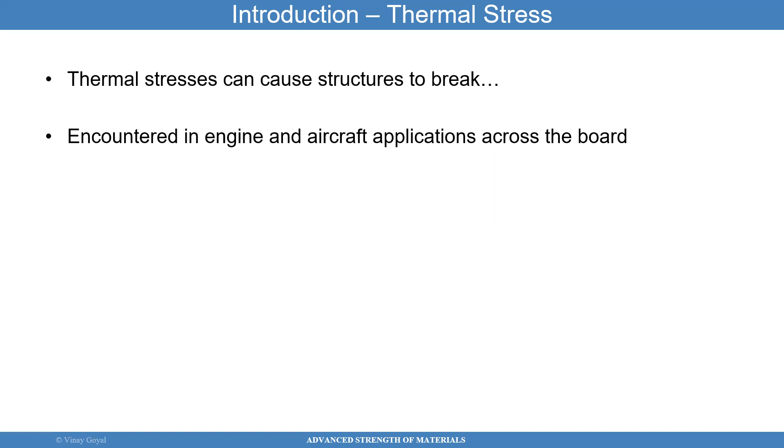So thermal stresses can cause structures to break. I gave you two examples, just practical examples for you to consider.

So even if there's no stress in the structure, and I apply a thermal loading to a structure, it's going to expand or contract. Alpha here is called the coefficient of thermal expansion, and the coefficient of thermal expansion can be measured in a lab environment. There are multiple tests that can be done to measure that particular property.

I won't particularly cover it today, but there is a test, the E831 ASTM standard, which is able to measure the rate at which the material expands as a function of temperature.

For some materials, alpha will also depend on temperature. So the coefficient of thermal expansion for a lot of the applications you'll be working on could be constant across a range of temperature, but let me emphasize, there are materials where the coefficient of thermal expansion can also depend on temperature.

If you recall, strain is a measure of relative deflection. So if I have no stress in the system, but I had a delta T and a strain shows up, that strain is showing up because of the delta T, the temperature you're introducing into the system, times the coefficient of thermal expansion gives you the strain.

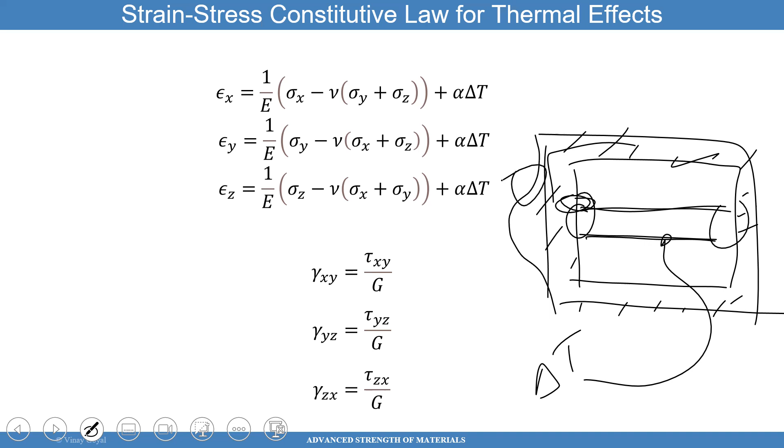Agree? If that bar is pushing out, don't you think you're going to get a lot of shear there? Potentially. But when I'm showing these equations, I'm talking about a material that's unrestrained in free air — just freestanding — and I applied a delta T load. That's what will happen. But it doesn't mean it won't produce a shear strain when it's embedded in something else. Does that make sense to you?

Okay, great — and then I do have another question. That's an excellent question, absolutely. In orthotropic materials like composites, you do have a difference in the coefficient of thermal expansion in each of the 3 directions. I have a whole series on YouTube that teaches composite materials where I cover how to deal with the coefficient of thermal expansion in that case. But for this particular lecture, I feel the right thing to do is stick to isotropic materials, and later on you can take a composites course that covers those more complicated problems.

Great, and so I can invert these relationships to get the stress-strain relationship.

I think we have a problem. This equation here — don't memorize it, but put some effort to understand how it was derived, because I actually derived these equations using just logic. They don't require some mathematical derivation, just experiments. I did some virtual experiments in class on how these coefficients can be derived.

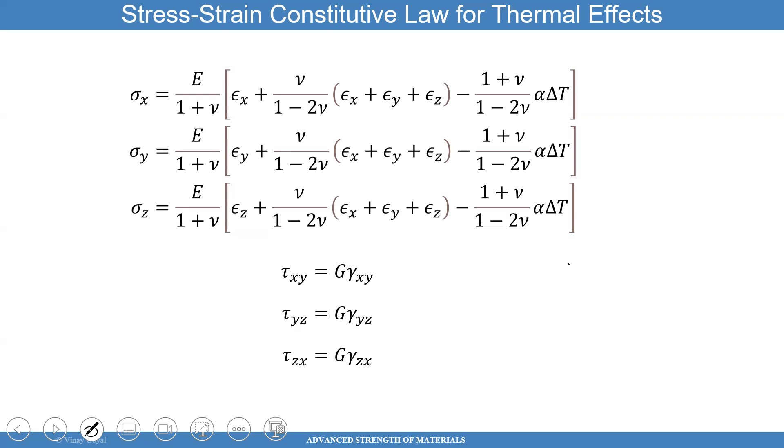I want to specialize this problem to 3D, because in 3D we can probably solve a lot of different kinds of problems fairly easily. In fact, we can do one quickly so you can see what it'll feel like. Say I have this rectangle here - this is the X, this is the Y, and this is the Z.

I have that chunk of metal that I'm trying to figure out what's going on. You can use this fairly quickly to solve any problem. So if I know this boundary is fixed, the epsilon x, say the x direction is fixed, and I apply a heat here, delta T.

Let's look at what we do know. We know the modulus, so let me circle everything that I know. I know the modulus, the Poisson ratio, the delta T, and alpha. In reality, I know all this stuff. The only thing I don't know, according to this problem statement, is epsilon xx, epsilon yy, and epsilon zz.

If you notice, because I'm fixing this on this end and this end here, I'm fixing that bar. For this particular problem, you can quickly see that epsilon xx should be 0. Let me erase this to make it more clear. This right here.

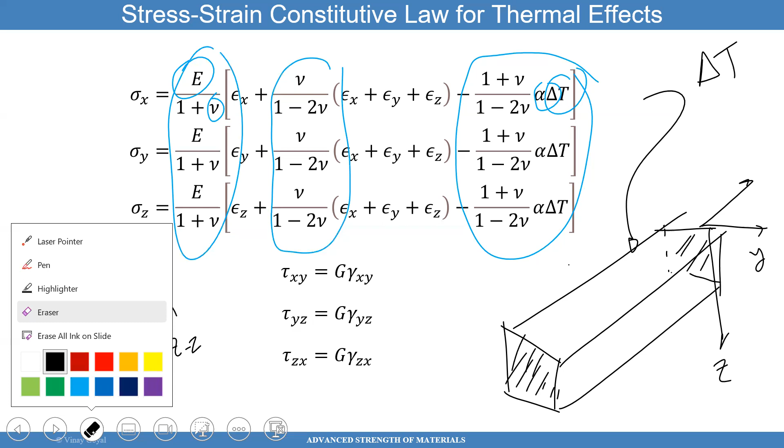I did order a pen, so it should arrive soon. And that way we can use a pen to explain this.

This is 0, right? We also have that on this boundary, the boundary surrounding this material, I'm not applying any stress - is that correct? I'm not applying any stress, so you can set that equal to 0. There's no stresses on this one at that boundary.

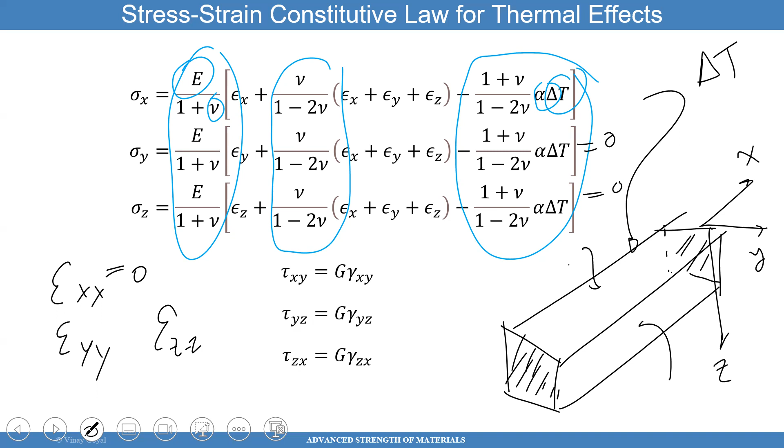Then you can use these equations to solve for the unknowns fairly quickly, for the strains, for the stresses, and all that. So 3D is fairly easy to visualize, but why don't we apply this to problems that we can actually get a solution for fairly quickly, for interesting problems, right?

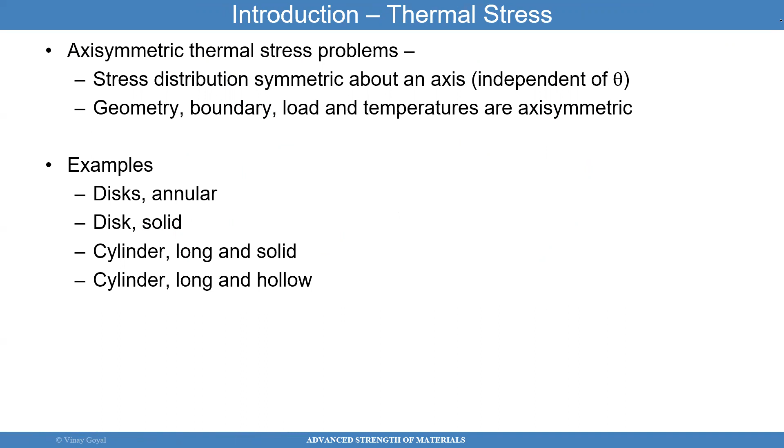So first, I'm going to cover disks - solid, annular - and then I'll move to a cylinder that's fairly long, solid, and then hollow again. So that's today's lecture. I'll apply the thermal stress concepts to that problem.

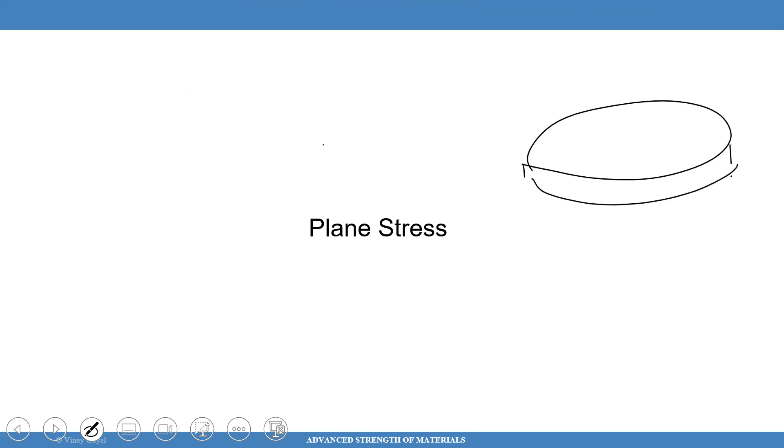Let's start with plane stress. A plane stress problem is one where the body of material is fairly thin, where through-thickness stresses cannot develop very much. To remind you what that is, say I have this disk, and this is the z direction. If this thickness h is relatively small, then sigma zz, sigma xz, and sigma yz will be approximately equal to 0.

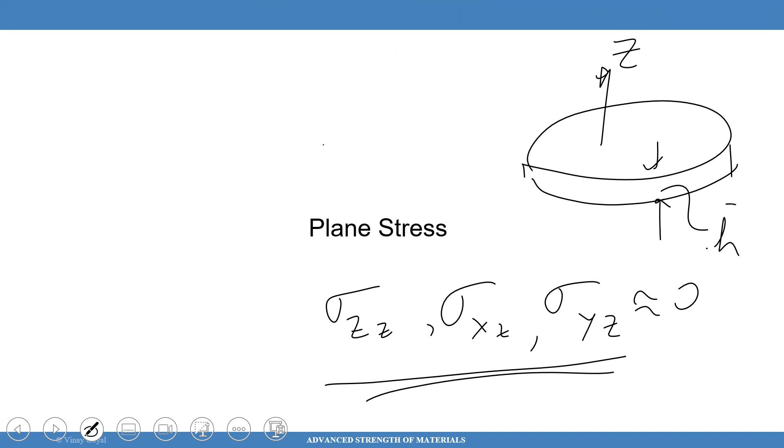Okay, so that's what plane stress means. You have a fairly thin subject of material where you don't have the ability of these stresses to develop into high values through the thickness because it's so thin anyway. So that's what's going on there with that particular thing.

Now let's revise everything now that I'm converting this to a plane stress problem. I'm going to drop the z term, and you can see here I did that because the cylinder in polar coordinates has r, theta, and z as the coordinates. If you recall, what you really have for the coordinate system is radius, theta, and z.

But I'm assuming that anything with z is 0 because we're assuming plane stress. As a consequence, I have simplified the strain-stress relationships by setting sigma zz to 0. And so now everything simplifies to what you see here.

Now here I put T, but delta T to me makes more sense. Every book does it differently - some books just put T, some other books put delta T. I think delta T makes more sense because if you're manufacturing something at room temperature, that's your reference temperature, and that's the unstrained state. So you need some reference to figure out what the strain is - it's a relative measurement.

So you need to understand, basically what I'm saying is delta T equals T, the final temperature, minus the initial temperature. And the strain is 0 at a temperature of T-naught. So it starts at a particular undeformed state, some set of coordinates of that system. But when you heat it up, it changes in shape or size. That's why I prefer using delta T rather than T. A lot of books use T, but I prefer the delta T approach. I just want to explain that to you.

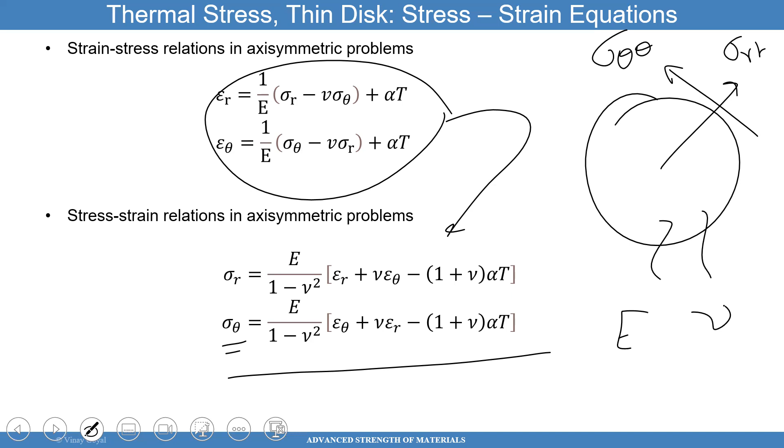We can now recur back to the equilibrium equations. This is the equilibrium equations, which we learned already from the previous lecture. I keep using the same formulas. If we assume axisymmetry, where we don't have any dependence on theta, then the tangential deflection V is 0. So there's no deflection tangentially, all the deflections are radial, and there are no dependencies on theta, so any derivatives with respect to theta are 0.

So therefore you get these strain deflection relationships. And what I can do now is plug these relationships into the stress strain relationships. I know the strains, so I can make the stresses a function of deflections, in the bottom equation there.

When I plug this into the constitutive law, what I get is, and then I plug this into the equilibrium equations. So that's step number 1: plug in the strains into the constitutive law, then plug those into the equilibrium equations as the next step. Let me clarify that.

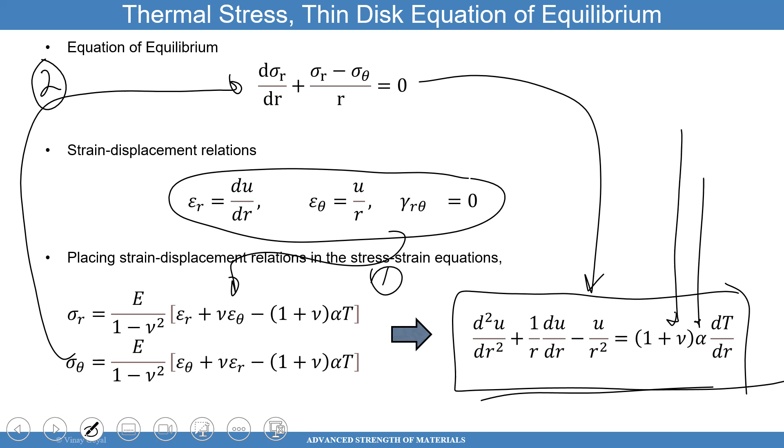So I plug the strains into the stress-strain relationships, and then plug the stresses into the equilibrium equations, and those turn into this differential equation, where the only unknown is deflection. I know alpha, I know the Poisson ratio, and the term on the right turns out to be the derivative of temperature with respect to radius, meaning the temperature can vary with the radius. What I can do now is simply solve this differential equation by integrating it.

So I did a little math trick, I did not invent this. You can take this equation here and write it a little differently. It turns out that this right here is the same thing as this right here. It doesn't look like it, but it is. This right here is the same thing as that. It's a little trick, I invite you to try it at home. I'm not going to do it here, but if you did it, I think you'd get the same thing as I have above.

So it's a little math trick, but it's very nice because now I can integrate this equation very easily. Integrate it once, and you can see here I integrated it. Then if you integrate it again, you get the deflection as a function of two constants, C1 and C2, integrating from A to R. Obviously you have to have somewhere to start, the limits of integration. Any questions so far on this particular point?

Let me remind you, the question was, what is U? I want to make sure that's clear. U is, let me draw it again to make sure we're all on the same page here. U is this deflection here, while this is V. And we're saying that V is 0, but U can be found, that's what I'm looking for. There's another question on here: why do I get a differential equation?

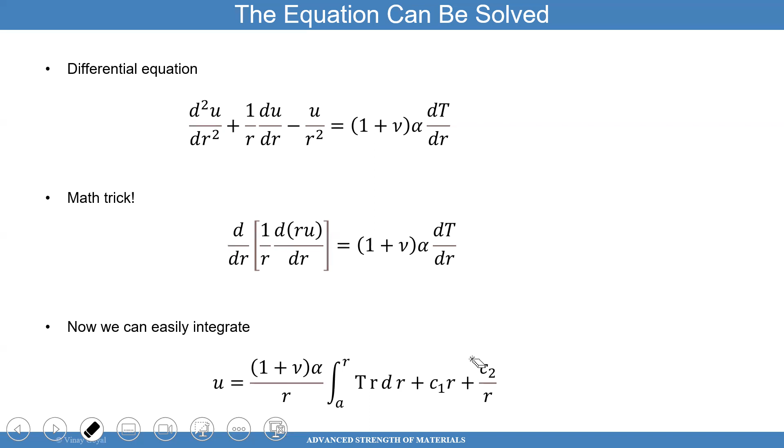How do I find constants in a differential equation? Boundary conditions. I need to study the boundary condition of the problem. For the general case, once you find the deflections, the radial deflection can be plugged into the strain deflection relationship, and once you know the strains, you can get the stresses.

And the stresses will look like this. It looks a little messy, but that's what you get. Once I know the solution for the differential equation, I can plug the radial deflection into the strain deflection relationship. Those equations, now in terms of deflection, can be plugged back into the constitutive law to get stress as a function of temperature, as you see in this equation.

So by solving for the deflection, I'm able to find the stresses as well. In other words, anytime you know the deflection, you know the strain, and if you know the strain, you know the stresses. How is that? Because if I know deflections, I know the strains through the strain deflection relationships, and then I know stresses from the stress strain relationship. That's how things are linked.

So we've done that, but now how do I find C1 and C2? I want to be able to use the boundary conditions. I'll pause here for a second in case there are any thoughts, pointers, or questions you have.

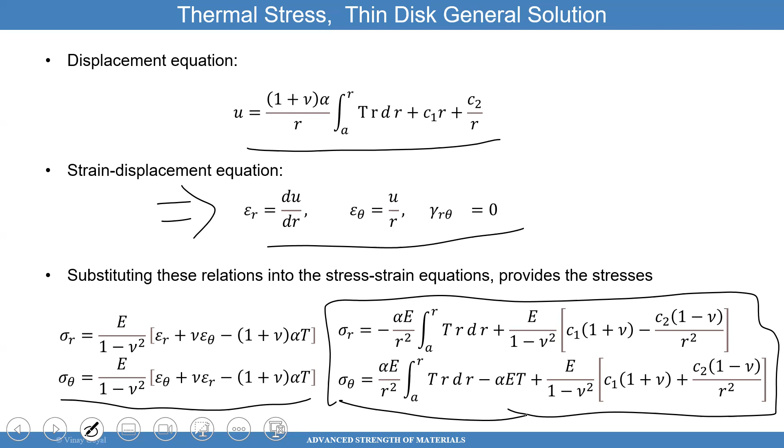If you don't have that, I'll move on to the next slide where I repeat it. I repeated this equation on the next slide because I know you're taking notes, so no worries.

I'm going to study an annular disk subjected to a thermal delta T, a temperature change. An annular disk is going to have these boundary conditions: the radial stress at R equals A, which is right here. I'm talking about this right here. Let me see if I can get the laser pointer to work. Right there, R equals A, and R equals B is over here.

At R equals A, the radial stress is 0 because it's a free surface and the radial component of stress is pointed radially, that's why that stress is 0. Outside of this body of material, you can see it's also a radial stress of 0, because there's no load acting to compress this. So the boundary conditions are this for the problem.

I'm ready now. All I have to do is notice that for this equation here, then one here at the top, sigma RR, I can impose these two boundary conditions, which gives me two equations with two unknowns for which I can solve for C1 and C2. I didn't do the derivation here because it's something you can do at home, but you get C1 and C2 fairly easily.

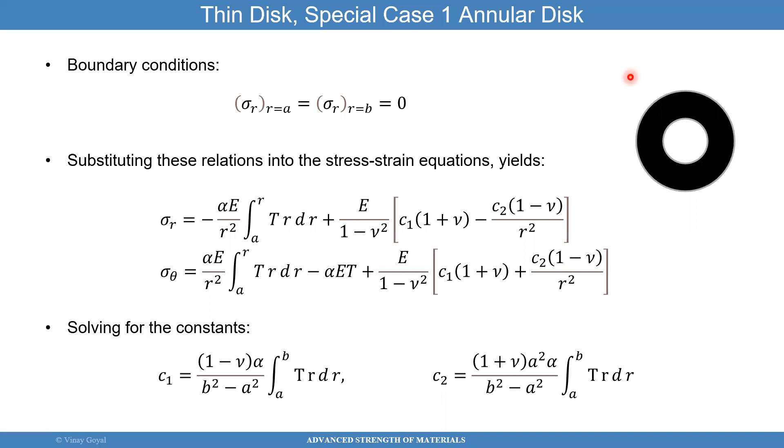All right, let's do that. Let's look at the solid disk. The solid disk is an interesting problem because I'm going to use the same equations. There's no reason why I cannot use the same equations, right? The difference is the boundary conditions. Will you agree that the difference between this solid disk and the hollow disk is the boundary condition? The equations are the same, but the boundary conditions are different.

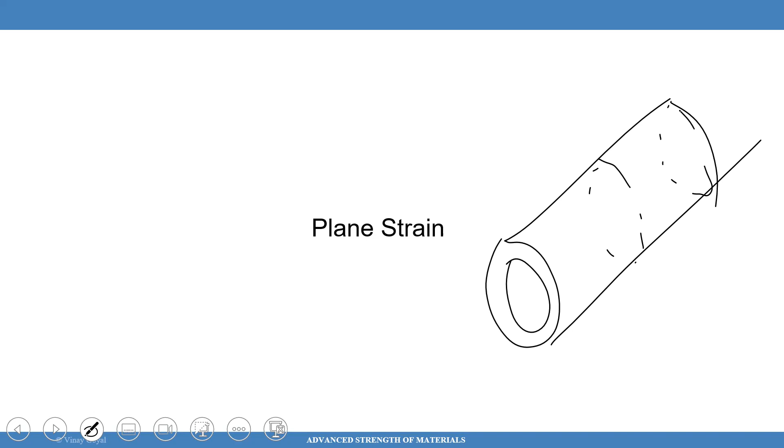Okay, so we're going to move on next to plane strain. So again, I'll cover thermoelasticity. This part B of the lecture today, I'll be covering how to apply it to a plane strain problem. What was really plane strain? Plane strain was a situation where you have a very long tube, and I'm able to say that every cross section is very likely to behave like the next cross section. If you can do that, you're able to simplify the problem further. So we're going to study that plane strain.

Let me remind you what the strain stress relationships look like. But before we tackle this problem, let's consider a long cylinder that is constrained on both ends, fully constrained on both ends. If the cylinder is constrained on both ends, doesn't that mean that epsilon ZZ is 0? Let me draw a picture of what I mean. I have this long cylinder, Z goes this way, X goes this way, and Y goes that way. What I'm saying is I'm going to fix it right here, and I'm going to fix it right here as well. Do you agree that if I'm keeping those ends fixed, there's no relative deflection of this surface to that surface? You agree? Doesn't that mean that in this direction, the strain should be 0? Because I'm keeping it fixed. Yeah.

So that means I can use the same constitutive laws I had before, but I'm going to plug in the fact that epsilon zz is 0. I can impose that condition. And if I impose epsilon zz equal to 0 in this condition, it turns out I can solve for the stress in that direction. You see that? I can solve it. If I solve for stress in that direction, I get nu times sigma r plus sigma theta, minus alpha times E times T. That's the stress along the cylinder, right? Any questions on that? Yes.

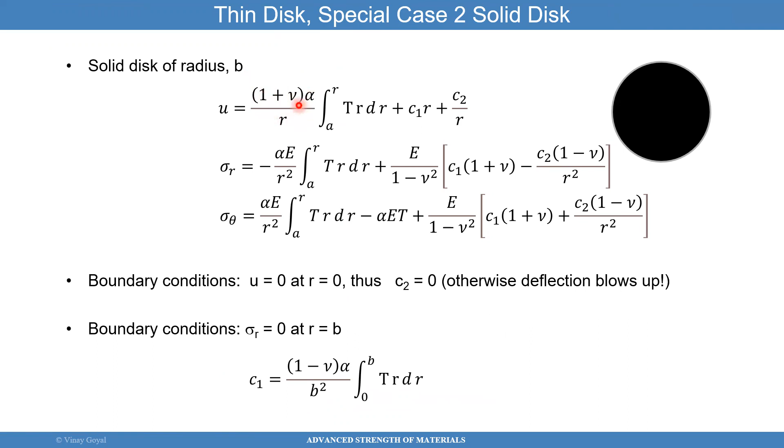This equation is different from the one we got for the plane stress situation. It looks very similar, but it's not the same, and I can compare them for you here. You can see this is 1 plus nu alpha divided by r for the plane stress situation, where the radial deflection is 1 plus nu alpha divided by r, but this one here is 1 plus nu alpha divided by 1 minus nu times r. So a little bit different there, the Poisson effect comes into play. It makes total sense to me.

So now that I know the deflection, step back. If I know the deflection, I know the strains in terms of the constants. If I know the strains, I can plug it in here and solve for stresses, which I didn't give you here, but you can solve for stresses. And when you solve for stresses, one of the stresses you get is radial stress. When you solve for radial stress.

Once I find sigma r, I'm ready because I can find sigma theta from this very equation here, the equilibrium equation. I know sigma r, plug it in here, solve for sigma theta. That's how you find sigma theta. I won't even go into the details on how to find that because that's a plug and play.

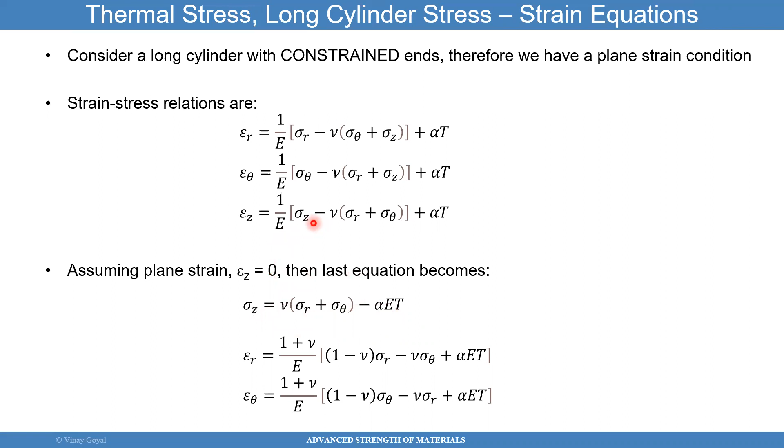Sigma z, I already gave you the formula for sigma z. It was over here in the back. Sigma z is that. I found sigma z by solving for epsilon z equals 0 from this equation. That's how I found sigma z. So just plug it in there, and when I do, I get this equation here for sigma z.

We'll just keep moving here then. No questions on that. Awesome.

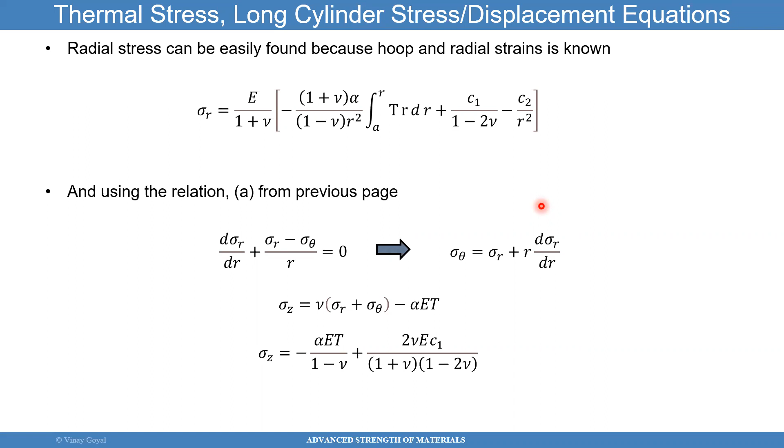Let's look at the problem of a solid cylinder with a fixed end. Let's apply the boundary conditions now, I haven't done that yet. So the boundary conditions for a solid cylinder: u equals 0 at r equals 0, because at the center of the solid disk or solid cylinder, the center cannot be moving around. So therefore, it's the same situation where C2 goes away.

It's the same situation also for the solid cylinder that sigma r is 0 at the outer boundary. So I plug in what r is, which is b at that boundary if the outer radius is b. And when you do that, you're able to find C1.

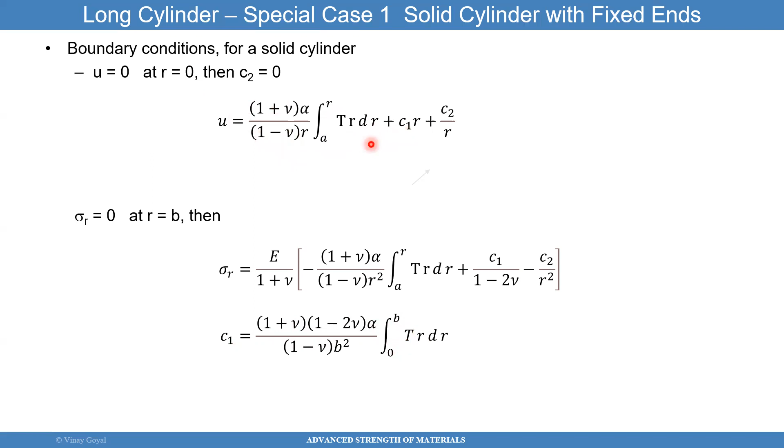So once you find deflection, because you have the deflection in terms of C1, you can see here at the bottom I found C1. Once I know C1, I know everything because I know the deflection in terms of C1. Once I know deflections, I know strains. Once I know strains, I know stresses. So they're all connected. Once you know one thing, you know everything else through this relationship you see here.

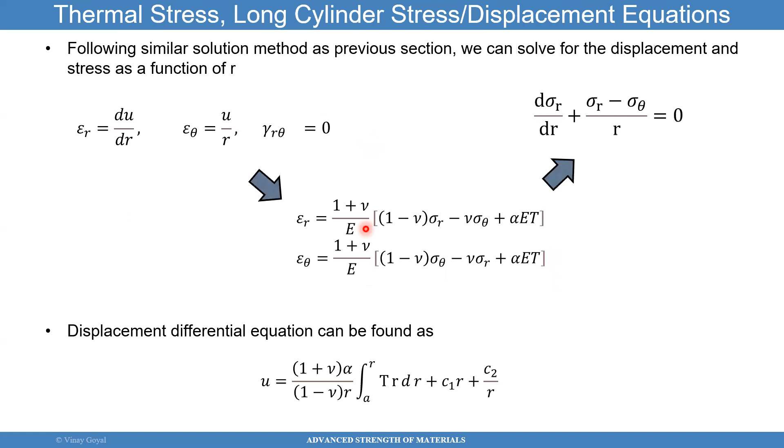Very cool, I think it's a very straightforward problem. You can see that everything turns out very nice. For example, if it's a solid material that's a cylinder, at r equals b, you can see that this term goes away. It makes sense because sigma r should be 0 at the boundary. So that makes total sense.

We can try other things like plotting the temperature. What is the temperature, say what is the stress in the center. We can probably solve for that too. You can do every combination you want, and see what will happen, just out of curiosity.

Okay, so that's what we get. Any questions?

Do you agree that if you're studying a heat conduction problem where you apply temperature, say to an iPhone, so it's getting hot where you're putting the charger, do you agree that temperature could vary across? So it's possible that I can give you a temperature distribution that's not constant. So delta T, I can tell you, hey in the exam that'll be problem number 4, that the delta T I'm applying can vary across the bar. Tell me what the stresses are. This should be able to account for that, right? Because then I can give you the temperature distribution as a function of radius, and you should be able to plug that in to solve for what the stress is.

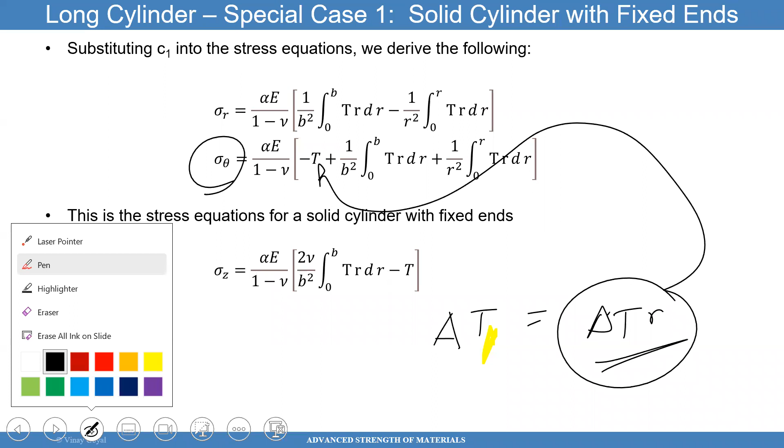Hopefully that's clear, that example problem. The more questions you guys ask, the more examples I have that I can use for the exam. So I appreciate that, I'm just kidding. I think they're great questions. Any other things that come to your mind?

I also did not say it will be an exam question. I said it could be an exam question. So you don't know if I'm bluffing or what I'm saying is going to be true. All you know is that you need to know the stuff. Okay? Do you need to memorize formulas?

We don't want to memorize formulas. I don't memorize formulas. Do you think I memorize these formulas? If I were to design a disk that's under heating conditions, will I memorize this formula? No. What will I do instead? Understand what the equation is saying and apply it. That's what I'll do. But you have to understand the problem statement, you have to understand the boundary conditions. If there's one thing here that you notice that we really have to get right, it's the boundary conditions. If you don't understand what to do with the boundary conditions, the solution will be wrong.

There is a question here that says, what order do you use superposition in? So you can add the stresses in any order you want, no problem. That's the first question that I was asked. Can I add the spin plus thermal plus pressure? Yeah, can I add it? So spin plus pressure plus something else? Yeah, you can change the order. It's adding up. Please ask your question. All the equations are linearly additive, so you can superimpose them.

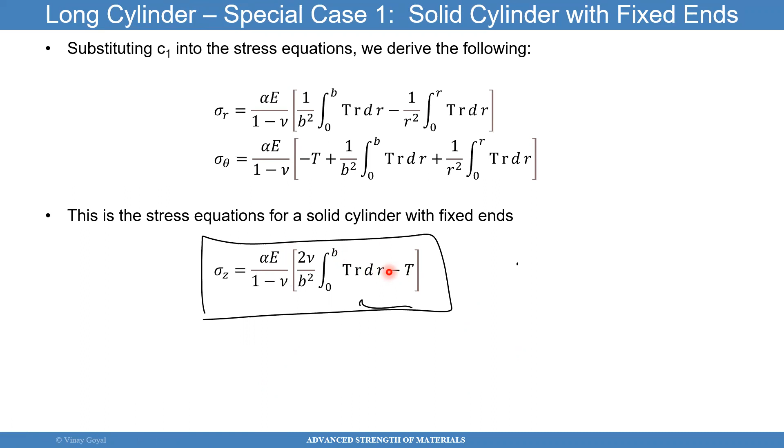You can also get the total stress in the z direction, because we found this stress here with the fixed ends. We're not using that formula directly, since that was for the fixed ends, but here I have this equation for sigma z that I had earlier. I can plug it in here to get S naught.

Then you can solve for sigma z total because you have two equations here, this equation and this equation, which give you two equations to solve for C1 and S naught. This gives you the unknown stress you need to apply uniformly to cancel things out, S naught, and C1 is the other unknown for the free end case.

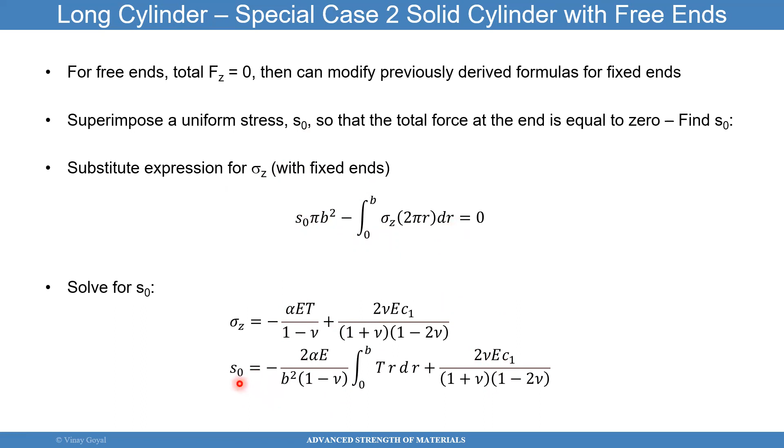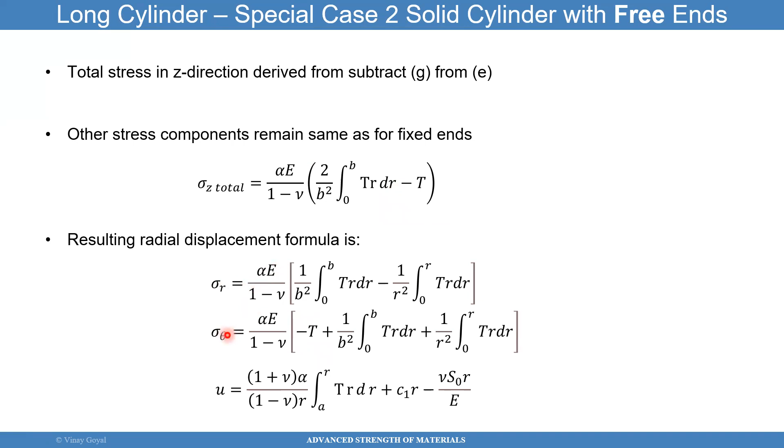So I need to figure out a way of solving for that, using this equation in combination with the other to get the total value. That's what I did, and I found sigma Z total. Once you know that stress across the Z direction, you can then find the radial stress, the hoop stress, and the deflections in a very simple way.

The other special case typically studied is a hollow cylinder with fixed ends, having an inner radius R equals A and outer radius R equals B. Again, it's the same formula as before, remember the plane strain condition with 1 minus nu at the bottom. You use the same formula, but impose the stress at R equals A and R equals B to be zero, and then solve for C1 and C2. Same stuff we did before, it's not changing.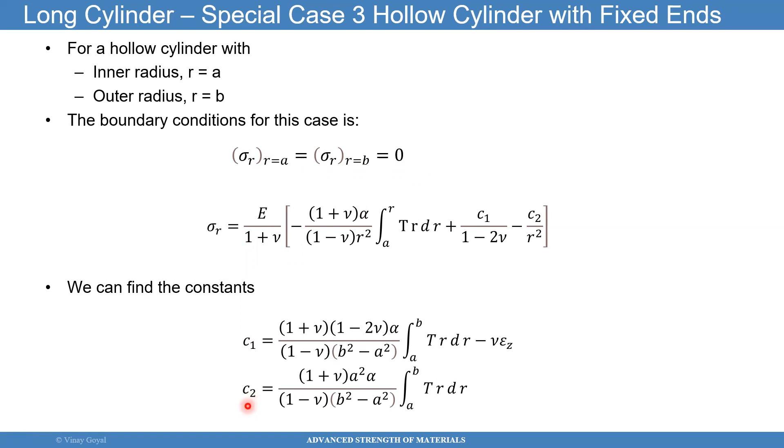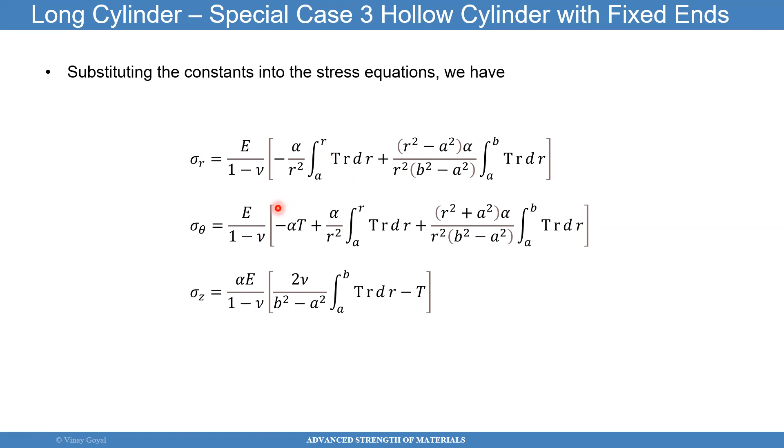Then you can find sigma R, sigma theta, and sigma Z in a straightforward manner. You can see here these are the stresses for the hollow cylinder case. I could keep going with the free ends special case, but I'll stop there since I don't think I'll cover this case necessarily. I'm showing it here so you understand the concepts and how this applies generally for different boundary conditions.

What I want to do now is end it right here at this point in time.